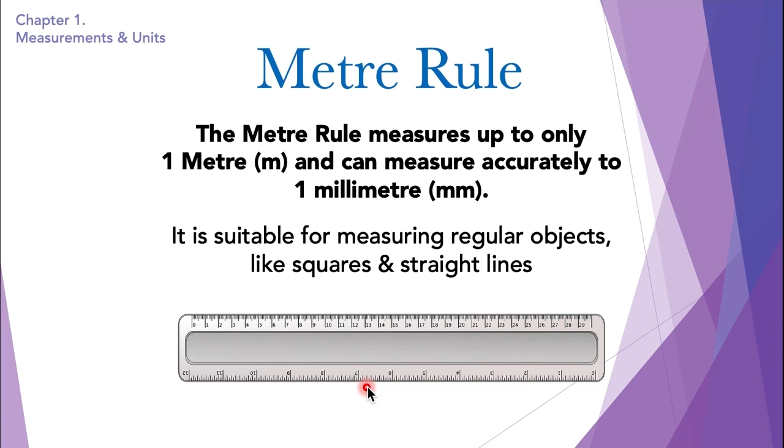So for doing that, we use a tape measure. So the tape measure can be used to measure long lengths as well as smaller ones. By smaller, we mean 1 millimeter. This is the smallest value a tape measure and a meter rule can measure. To measure even smaller ones like micrometers, we use other tools like the vernier calipers and the micrometer screw gauge. But for now, let's stick with tape measure.

The tape measure can be used to measure long lengths as well. And because the tape is flexible, it can also measure diameters of cylindrical objects or lengths of bent wires. Okay, so this was the tape measure and the meter rule. Now let's move ahead onto the vernier calipers.

So the vernier calipers measures up to 1/10 of a millimeter. So if I divide a millimeter into 10 parts, the 1/10th part of this millimeter is the accuracy of the vernier calipers. So the calipers is used to measure small lengths, internal diameters and external diameters of pipes and tubes.

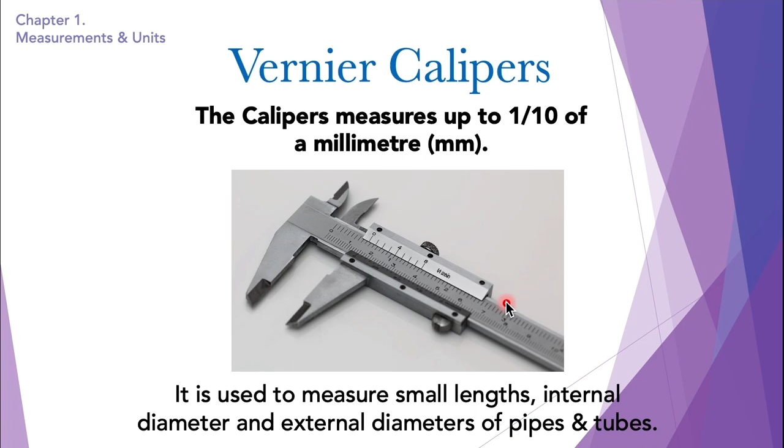Now of course 1/10 of a millimeter is impossible to be measured by a human eye because 1/10 of a millimeter cannot be seen. So that is why a meter rule and tape measure would not be able to measure up to 1/10 of a millimeter. Only the vernier calipers can measure this. So let's look into the vernier calipers in a more detailed way.

So this is the vernier calipers. In the vernier calipers, we have jaws to measure the internal diameter and jaws to measure the external diameter or lengths of objects. For example, the diameter is being measured in this object over here. Now the vernier calipers has 2 scales. One is the vernier scale and the other is the main scale. This is the main scale and this is the vernier scale, the small one over here. So we have a screw to tighten the jaws of this vernier calipers.

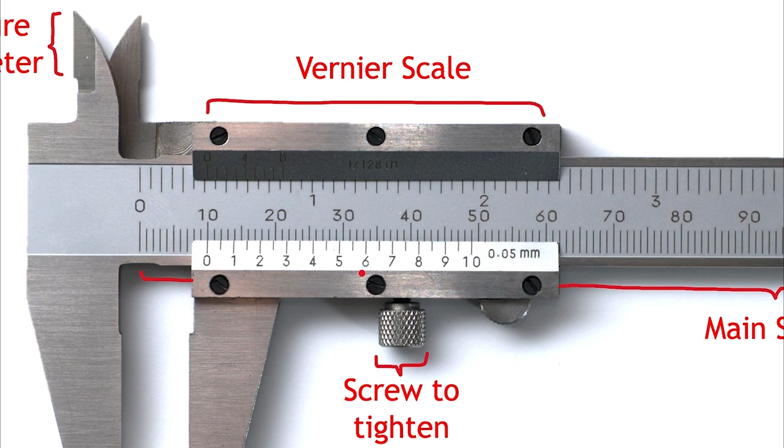How do we measure using this vernier calipers? It is not very difficult. So for example, here I have a vernier calipers and this is the object I want to measure. I open the jaws of this vernier calipers, place the object and tighten the jaws around it. Now as you can see, it is written over here that this vernier scale is calibrated in 0.02 millimeters. So this single mark is equal to 0.02 millimeters.

So this one mark represents 0.02 millimeters, then 0.04 millimeters, 0.06 millimeters, 0.08 millimeters, and 0.10 millimeters is when we get over here. So now we're going to look at the main scale.

The main scale reading is read just beside the 0 of the vernier scale. This is the marking that is just to the left of 0, and we're not going to go over the 0, we're going to stay behind the 0. So this is 10, 11, 12, 13, 14, 15, 16, 17, 18, 19. So 19 millimeters is the main scale reading. So after that we have the vernier scale.

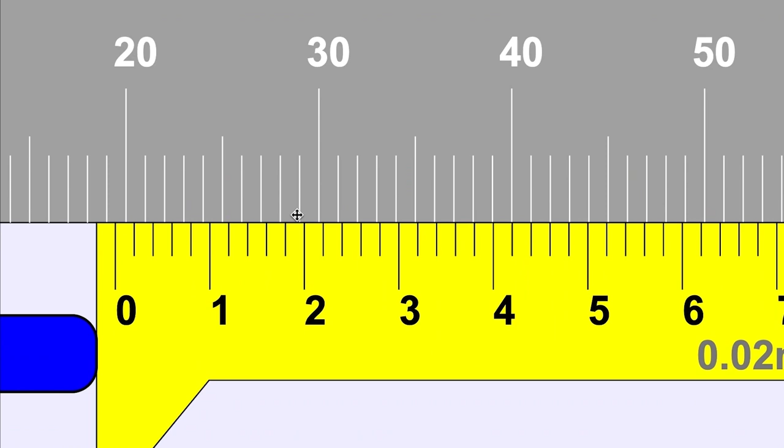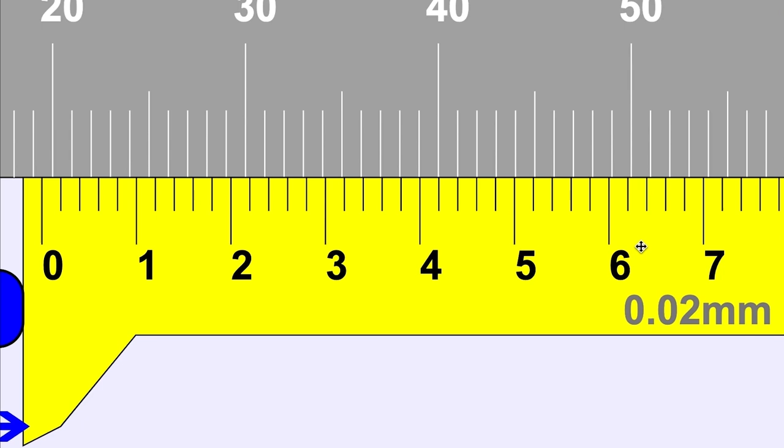Now it is written that 0.02 millimeters is what each marking of this vernier scale represents. So let me read this vernier scale. 0.02 millimeters, 0.04 millimeters, 0.06 millimeters, 0.08 millimeters, and then we get 0.10 millimeters, and then we have 0.12 millimeters, 0.14 millimeters, 0.16 millimeters, 0.18, and so on. This is how this vernier calipers is calibrated.

Now we're going to find a marking of this vernier scale which is exactly aligned with the marking of the main scale. And the marking that is exactly aligned with the main scale is this one. What is this marking? How are we going to read it out?

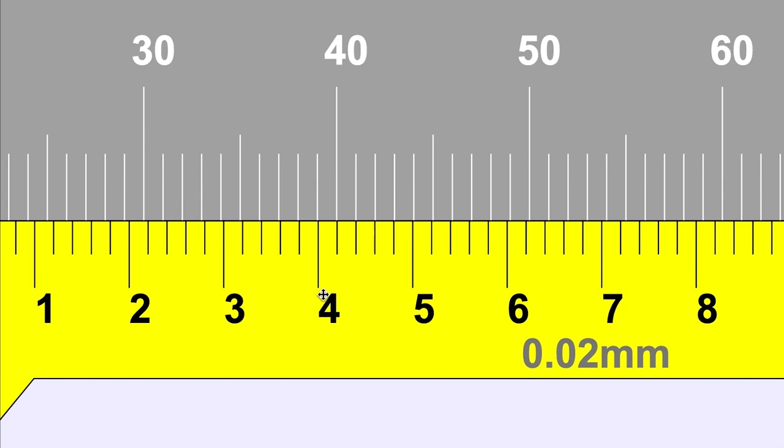This marking over here represents 0.40 millimeters. Then after this marking we have 0.42 millimeters, and then this marking is 0.44 millimeters. So 0.44 millimeters is the vernier scale reading and 19 is the main scale reading. When we add this vernier scale reading to the main scale reading, which is 19, we get the answer.

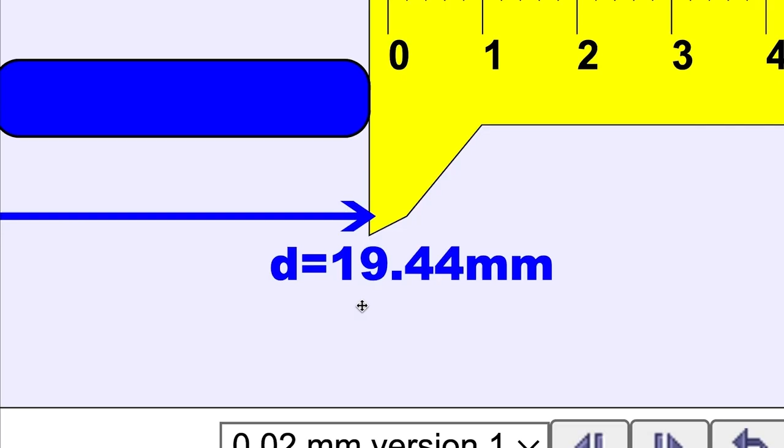The answer is 19.44. So this is the answer of this vernier calipers. This is how we use a vernier calipers to measure an object's length or diameter.

Basically, read the main scale just to the left of 0, and then the vernier scale. How do we do that? We find the markings of the vernier scale which are exactly aligned with the markings of the main scale, and then we add the vernier scale reading to the main scale reading to find the answer. This is how we use the vernier calipers.

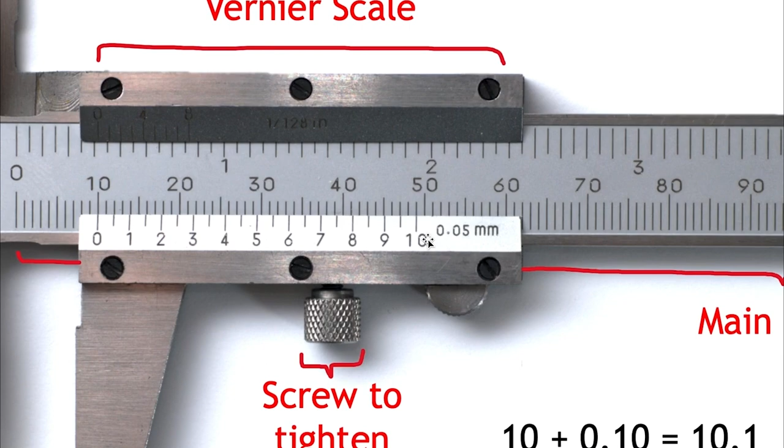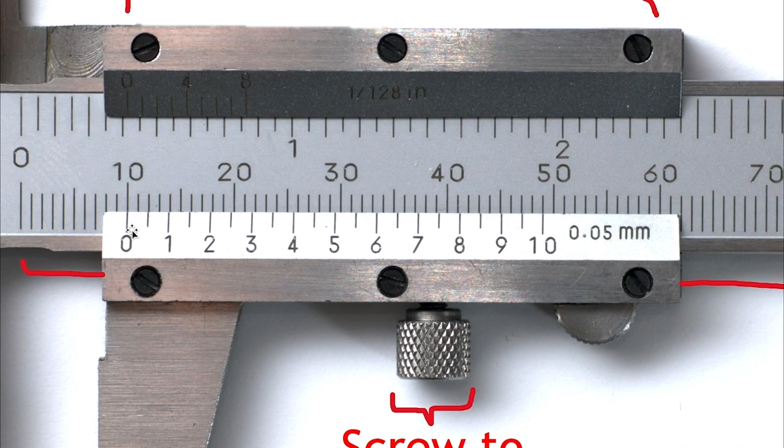The vernier calipers can be calibrated in many different things. For example, this vernier calipers is calibrated in 0.05 millimeters. So the least count of this vernier calipers is 0.05 millimeters, which means that a single marking of this represents 0.05 millimeters. From 0 to 1 we have 0.10 millimeters. This is how we use our vernier calipers to measure an object's diameter or its length.

Now let's go ahead and find out what the zero error is in the vernier calipers. A zero error is basically what happens when, even with the vernier calipers jaws closed, it shows a reading. If it shows a reading, this means the vernier calipers has an error. For example, this vernier calipers' jaws are tightly closed together with no object in between, but it still shows a reading over here, and this reading is basically the zero error.

Now, how to read the zero error? In order to measure using this zero error vernier calipers, we would have to know the zero error, and then we're going to find out how to measure accurately with this vernier calipers having a zero error. So there are two types of zero error.

One is a positive zero error and the other is a negative zero error. The positive zero error is when the zero on the vernier scale is to the right side of the zero of the main scale. A negative zero error is when the vernier scale zero is to the left side from the zero of the main scale.

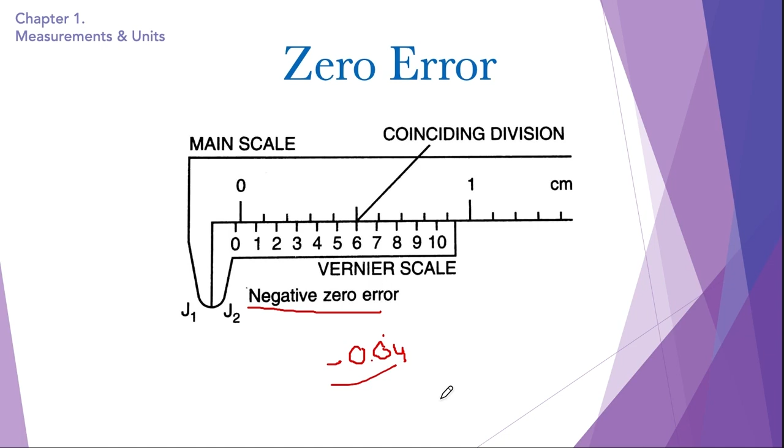So this is how we find the zero error in the vernier calipers. Now let's look at some examples. Here we have some vernier calipers with their zero errors and their correct readings - these are the readings. The vernier calipers are shown with the jaws closed, so we're going to find the zero errors of these vernier calipers. And these ones are measuring an object, so they're giving a reading. Obviously the reading is not correct - we have to minus the zero error from this reading to find the correct reading. Now you can pause the video and find out the zero error of this vernier calipers and do the calculation.

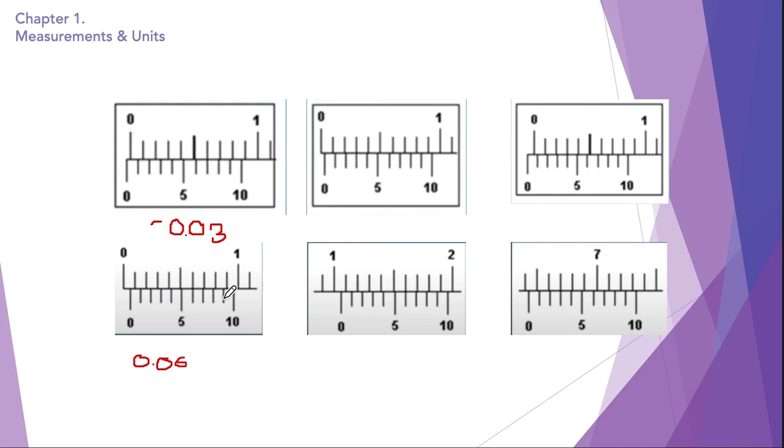The zero error of this vernier calipers is minus 0.03. Because it is a negative zero error, we read it from this 0 - 1, 2, 3 is the marking that is exactly aligned. So 0 minus 0.03 is the zero error of this vernier calipers. Now for the correct reading, first we find the reading it is showing: the main scale is 0, and we find which marking is exactly aligned with the main scale marking - over here we have 6, so 0.06 is the reading. Now we minus this zero error from this reading, and because minus minus is plus, the answer is going to be bigger than the initial reading. So the correct reading of this vernier calipers is 0.09.

Now here we have another vernier calipers with a zero error and reading, so find out the zero error and correct reading. The zero error of this vernier calipers is 0.03 - because it is positive, we start from here: 0.01, 0.02, and 0.03 exactly aligned. Now how do we find the reading of this vernier calipers? We first find the main scale reading, which is 1 millimeter. Then we find the vernier scale reading, which is 0.06 millimeters. We add these two readings, 0.06 with 1, and we get 1.06, which is the reading of this vernier calipers. Now we subtract the zero error from this reading to find the correct reading, and the answer is 1.03. So this is the correct reading of this vernier calipers.

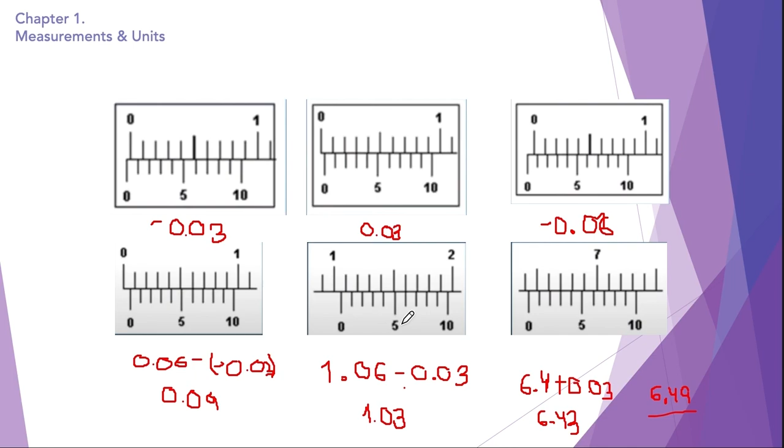Now that we've understood the vernier calipers and the zero errors, and how to find the zero error and correct the given readings with the zero error, we can now move ahead onto the micrometer screw gauge.

The micrometer screw gauge measures accurately up to 1 millionth part of a meter, that is a micrometer. If we divide a meter into 1 million parts, we get a micrometer, and a screw gauge measures accurately up to a micrometer. So it is even more accurate than a vernier calipers.

So this is what a screw gauge looks like, a micrometer screw gauge. Let's go into a much more detailed version of the micrometer screw gauge.

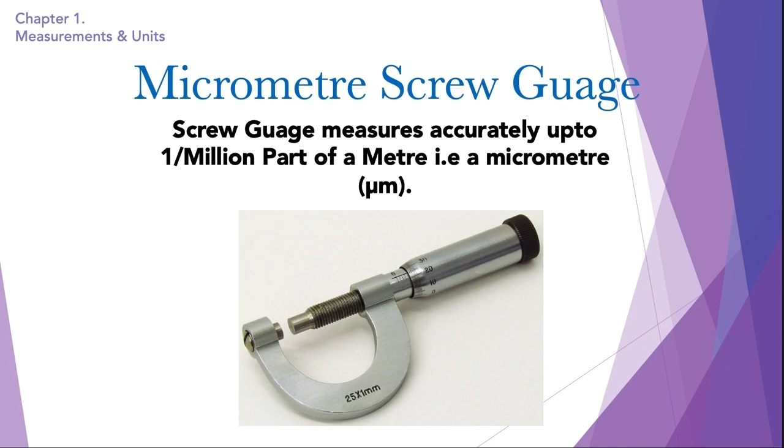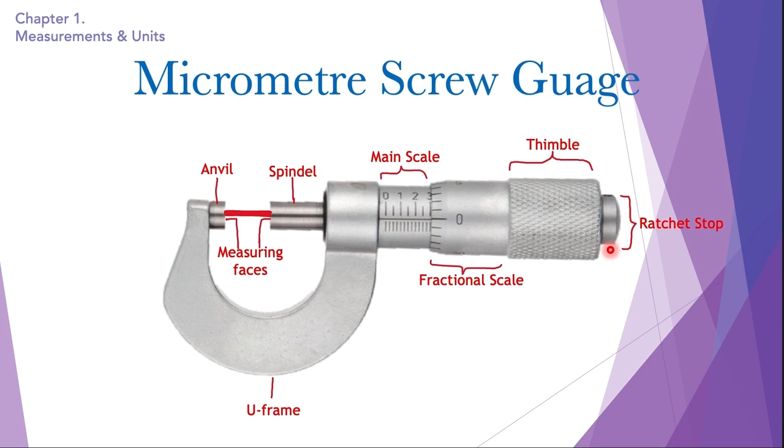Here we have the measuring faces of this, the anvil and the spindle, and this is the U-frame. These are the jaws of this micrometer screw gauge. It also has a main scale and a fractional scale which is on the rotating barrel, this is the thimble, and the ratchet stop, which is used to apply just the right pressure onto the object being measured.

Here we have this micrometer screw gauge. Now, how do we read it? The micrometer screw gauge has a main scale and a fractional scale. The main scale tells us the measurement in millimeters, and the fractional scale tells us the fraction of the millimeter that we have to add to the main scale reading.

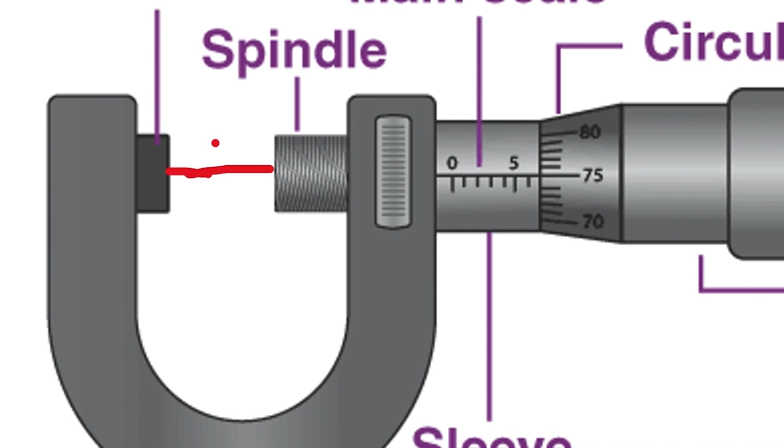For example, even though it's not measuring any object here, it is still open, not closed. So this micrometer screw gauge has the main scale reading shown like this: 0, 1, 2, 3, 4, 5 - that's 5 millimeters, then 1 millimeter, 2, 3, 4, 5, 6, and 7 millimeter is the point where it ends. So 7 millimeter is the main scale reading.

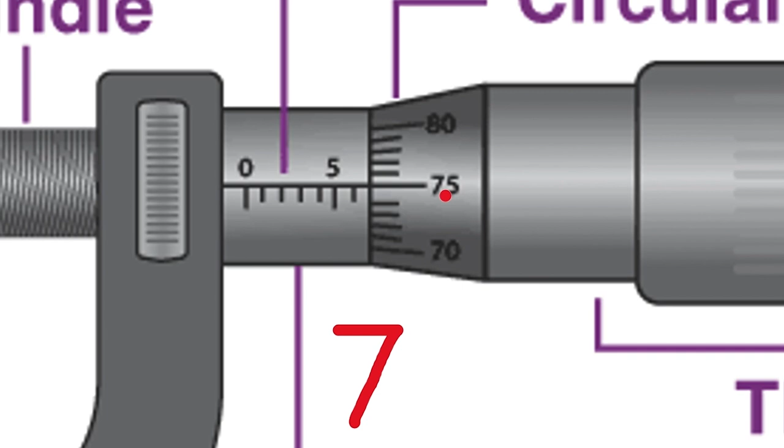Then we have to look at the fractional scale. The marking of the fractional scale that is aligned with this line is 75, as can be seen. This 75 is written as 0.75. If the number is in tens, we say 0.75, and if the number is in units, we say 0.01 or 02 or 03, so 0.04 or 0.06. But if it's in tens, we write it this way: 0.75 - no zero in the middle, no zero after the point.

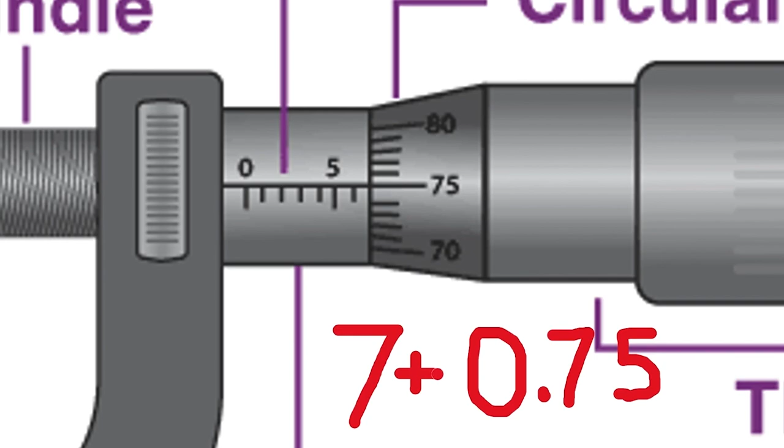Now we add the main scale reading and the fractional scale reading to get the answer, which is 7.75. So this is how you measure an object's length or diameter using the micrometer screw gauge.

Let's do an example over here. What is the reading this micrometer screw gauge shows?

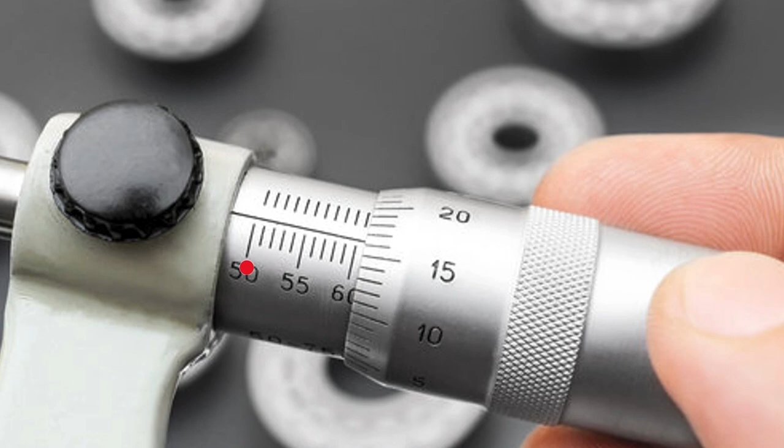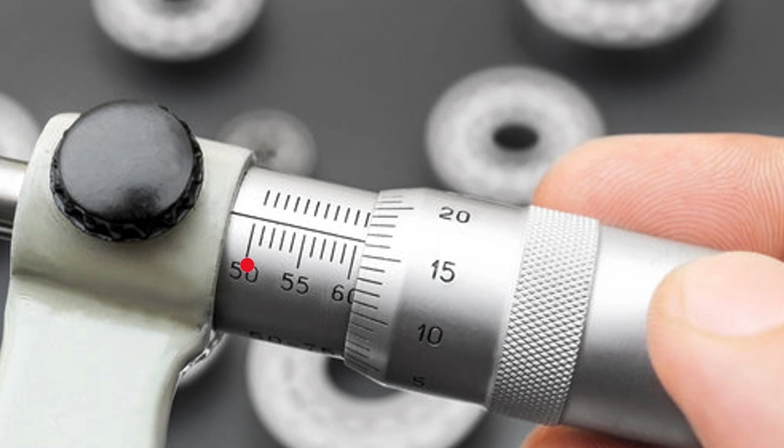The main scale is this one, and it is calibrated something like this: 50, and the upper dots represent 0.5. So if this is 50, the upper dot will be 50.5, then this one is 51, then 51.5, 52, 52.5, 53, 53.5, 54, 54.5, and 55. Now this is 60, and the main scale ends at this point, which is 60.5.

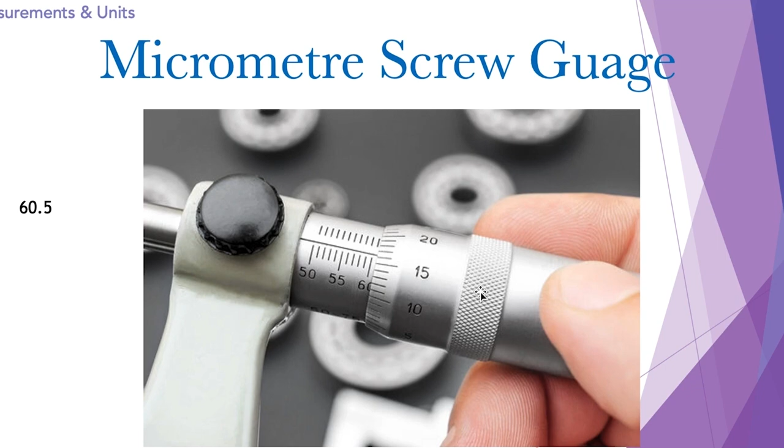So the main scale reading is 60.5. Let's write it down here - this is the main scale reading. And the fractional scale reading is: 10, 11, 12, 13, 14, 15, and 16. So the fractional scale reading is 16, so it is 0.16. We add 0.16 to the main scale reading and find the answer, and the actual reading is 60.66. So this is how we measure using a micrometer screw gauge.

The main scale is calibrated in millimeters and 0.5 millimeters, something like this. So this millimeter is 1 millimeter and that one is 0.5. So if that mark is 50, it would represent 50.5. Then the fractional scale tells us the fraction of a millimeter that we have to add to the main scale reading.

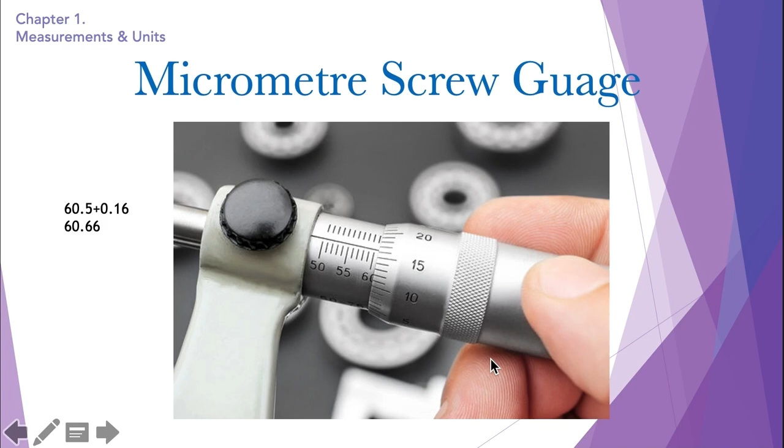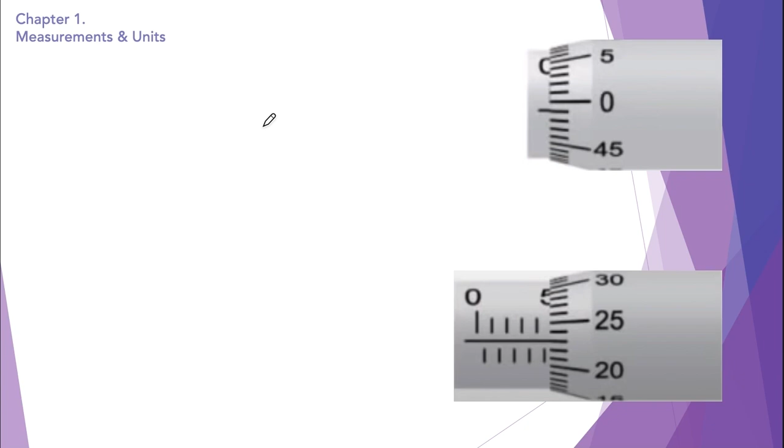So we're going to write down the zero error. What is the zero error? It is 0.01. Because of course the distance is of only one marking, so the zero error of this micrometer screw gauge is minus 0.01. So this is the zero error.

Now here we have the reading of this micrometer screw gauge. So what is the reading? Firstly, we're going to read out the reading and then correct it. So the reading is 0, 0.5, 1, 1.5, 2, 2.5, 3, 3.5, 4, 4.5 and 5. So the reading is 5.

This is where the main scale is actually ending. So the reading of the main scale is 5, and the reading of the fractional scale is 20, 21, 22, 23. 0.23 is the reading on the fractional scale. So we're going to add these two readings and we get the answer, which is 5.23.

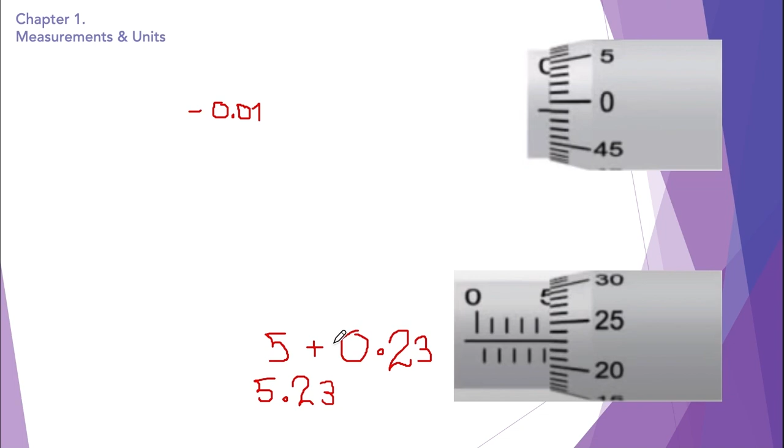So this is the reading of the micrometer screw gauge, but it is not a correct reading because the micrometer screw gauge itself has a zero error. So in order to correct this reading, we will minus this zero error, just like we did in the vernier calipers. So we minus the zero error, which is minus 0.01. Always remember to put brackets, because if we are minusing it, we will put two minus signs, so we have to put a bracket in between in order to make this a separate value.

So when we do this, the minus basically becomes plus, so the reading is higher. So don't confuse this, because in maths, minus times minus is equal to plus. And the answer is 5.24. So the correct reading is 5.24. So I hope now you've understood the zero error and the way we calculate the zero error and subtract the zero error from the readings that we get from a micrometer screw gauge which has zero error.

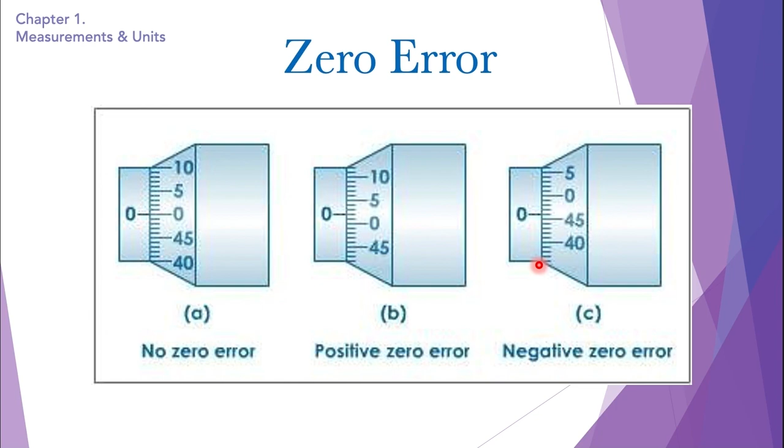So if the zeros are aligned together, there is no zero error. If they are not aligned together, there is a zero error. And if the fractional scale 0 is lower than the 0 on the main scale, then it is a positive zero error. If it is above the 0 on the main scale, it is a negative zero error. We will just basically count the markings from the fractional scale 0 to the main scale 0. If it is a negative zero error, we count it backwards; if it is a positive one, we count it the right way. Then we correct the reading of such a micrometer screw gauge by minusing the zero error from it.